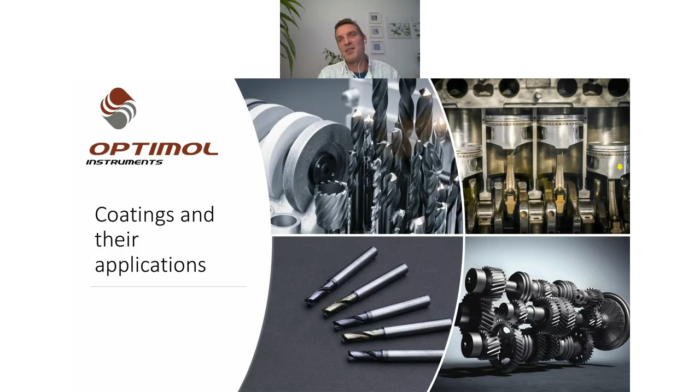But it's not only on the technical side or in industry sectors, it's also in everyday use or in our everyday life. For example, one of the major impacts of coatings will be medical applications. If you are thinking of the tools the doctors are using

Sorry, because sometimes the chat comes into my screen and this is a little bit disturbing, but to move on.

So medical applications are a wide field of application because of their tools. Think of their cutting tools when they need to grab something from your body, but also knee or hip replacements. So I'm talking about the joints, because it's gaining more and more importance if you need to implant something into the human body, but also in the household.

If you have a look in your bathroom, razor blades, for example, or the blades of scissors are also coated, as well as pens and all the things in your kitchen. And more important is all about electronics and electronic plug-in connectors. Maybe you're familiar with gold coatings, but there are a lot of other coatings applied onto electrical connectors. With the pictures shown at the very beginning, maybe I can sum it up on this slide.

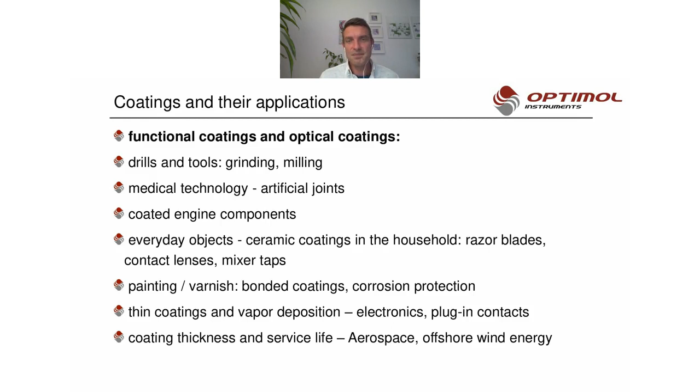So this being said, there seem to be a lot of benefits with technical coatings. Otherwise, they wouldn't be implemented or released to the market. One of the major benefits, from my point of view, is that you are able to adjust the properties of the surface which is getting in contact. And there are a lot of possibilities. For example, you could produce multiple-layer coatings. And sometimes it's used for defined running-in behavior of systems.

Coming back to the applications in passenger cars, in the past it was crucial to drive the first, let's say, 1,000 kilometers very smoothly to make sure all those engine components were running in properly. But nowadays it isn't necessary anymore. So you can move on at full throttle because the critical parts are coated already and they are targeted for defined running-in behavior because of a multi-layer coating.

Another, more in-depth example is that you are able to combine properties of your materials. For example, you can use a very cheap cast iron base material, bulk material, and use the positive properties of those materials, and then add a very hard or super hard surface finish, for example, with DLC coating.

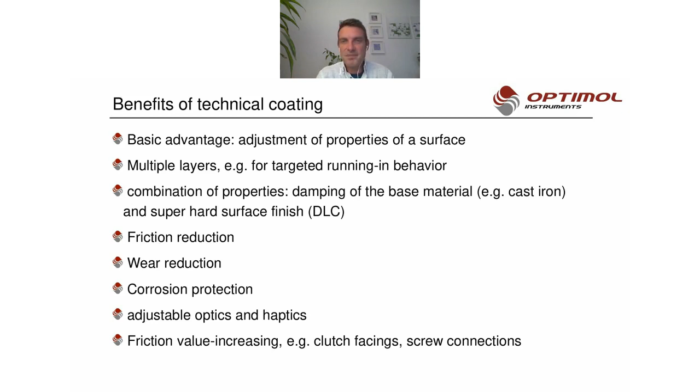But if there are benefits, I really often say if there is a lot of sunshine, there are also a lot of shadows. And I just want to mention some challenges with these technical coatings, and you can handle those better if you have a deeper understanding, for example, if you are running tribological testing with those solutions. So first of all, it's way more expensive, obviously, because if you are using additional technology and additional processes, you need materials, you need time, and all that comes together as an additional cost factor. And sometimes it's missed in discussions, and that's why I pointed it out here.

All those coatings and processes need to have a suitability for large-scale production, because if you're thinking of, for example, Volkswagen or medical applications, you need to make sure that there is quality assurance and that the products will work for millions and millions of parts if you release those to the market.

Another thing is, most of those coatings are not so friendly, let's say, with lubricants like oil or greases, because those oils and greases already on the market are very often produced and developed for metallic surfaces. But most of those coatings we are talking about are non-metallic, or they are not behaving like iron or steel. And that's why you need to make sure that not just the counter body and your basic body, which are in contact, are working fine together. It needs to work also with the lubrication.

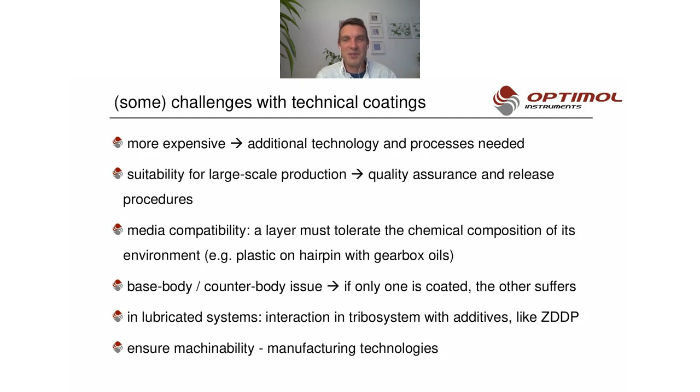And last but not least, you need to make sure that you are able to machine your coating. Because if you have manufacturing technologies like grinding or honing processes, you need to make sure that the surface is not too hard and has good bonding to be able to manufacture it.

And before I come and show some case studies we did, I would like to sum it up. What are the opportunities of technical coatings? First of all, it's very often an enabler for new concepts, because if you're failing with classic material combinations, or you need to have more performance, for example, in engine cars, you would like to introduce new material combinations. And very often they are done with coating processes.

And very often I saw suggestions for using coatings because there was a problem or an issue in the field. A lot of people like to introduce coatings as a problem solver, as I called it here. So just to reduce the energy consumption, for example, of the car or of the electrical systems, to increase efficiency due to a lower friction situation, or to extend the lifetime or service intervals, for example, the oil change interval.

Another beneficial way is to use coatings if you are faced with dry contact areas. Sometimes it's not possible or not suitable to use lubrication. There is a good example in aerospace applications, because if you are running your systems in vacuum or without any G-forces, your lubrication will not stay at the contact zone. Sometimes the areas get dry, and then you need to have a good friction and wear situation, even if there is no more lubrication in the system.

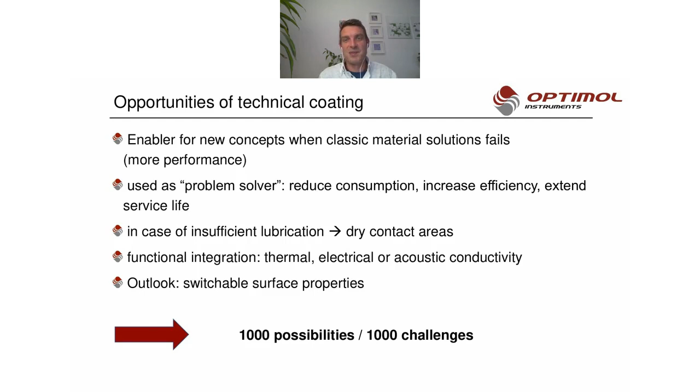And as an outlook to the future, a lot of people are talking about whether it's possible to use coatings which can be actuated, and then you will end up with switchable surface properties just at the click of a button. This will not be possible with classical material solutions, and therefore it's sometimes necessary to introduce new kinds of coatings. But on the other hand, if you have 1,000 possibilities, very often you end up with 1,000 challenges. And that's why I would like to introduce some case studies.

And before I come to those, I would like to talk about who is involved in implementing coatings, on a technical level or in the industry, and who needs to handle those challenges. From my point of view, there are three main topics or departments, let's say. On the one hand, it's research and development, because if you want to implement a new product, new solutions, more performance or a lifetime increase for your systems, you need to do research and development in both industry and university.

And the main focus should be that all your activities need to be cost effective. So low cost because of less time-consuming testing, as well as low need for parts or test specimens, let's say. On the other hand, you need to have a risk-free method, because it's not possible to use one engine a day to test a new coating, because of failure rates. It's getting way too expensive.

And besides research and development, the next step will be series production, as I called it. The typical two challenges there are that you need to have something for your supplier qualifications, and you need to make sure that you have methods for your quality assurance department. So you need to monitor your systems in the series or in the field.

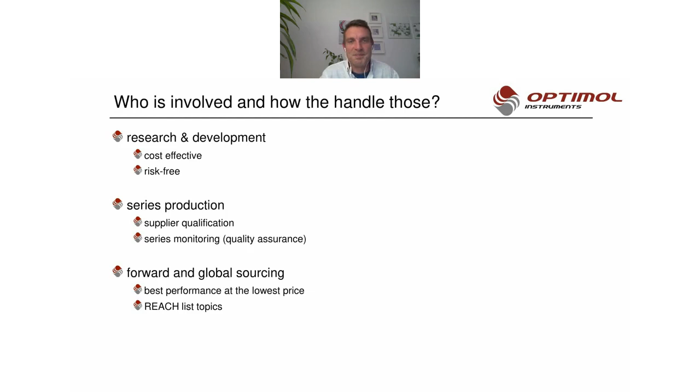And on the other hand, when you're thinking of crises like the war in Europe, sometimes it's not even possible to purchase parts, and then you need to have a solution from another supplier or another technical solution, for example, a new material combination. And to answer all those questions, you need data, and those data are provided by tribological investigations, for example, the use of tribometer test rigs.

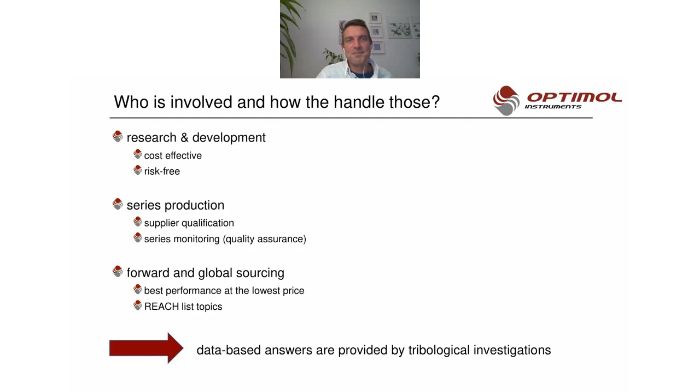And maybe, I'm not very sure, maybe Gregor would like to add something, otherwise I will move on.

Yes, now I'm with you. Okay, so then move on. Yeah. Thank you.

Thank you very much, Patrick.

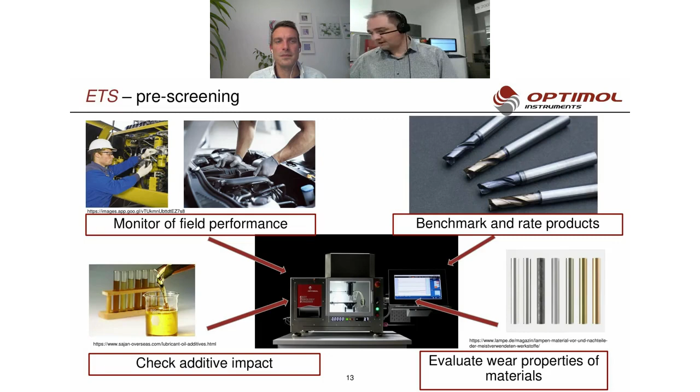We can benchmark products. We can, when talking about lubricants, check the impact of additive packages directly online. And of course, we can evaluate the wear protecting properties of materials and coatings and lubricants as well. This is what we are doing with the ETS, as I already said. Easy tribology screener, a small tabletop tribometer with a linear reciprocating electromagnetic drive, sinusoidal movement. I will show you later in practice how it looks like.

With a range of parameters, the normal force from 1 Newton to 300 Newton, frequency from 10 to 70 Hertz. Stroke length is variably adjustable between 10 micrometer and 3 millimeter, temperature adjustable. And the interesting point, we can measure in situ the online wear in terms of wear depth, with very great resolution, and we can also measure in situ the coefficient of friction, which is the indicator of friction losses during movement.

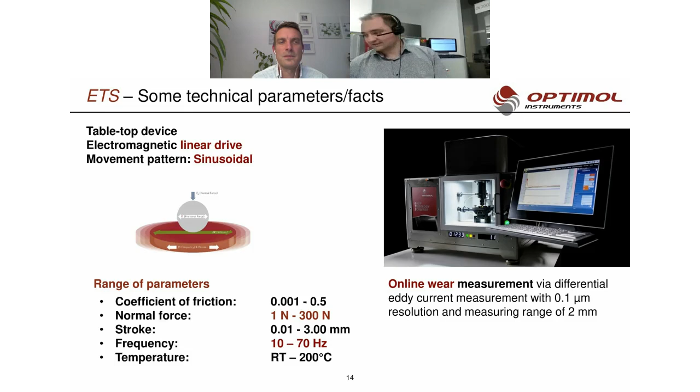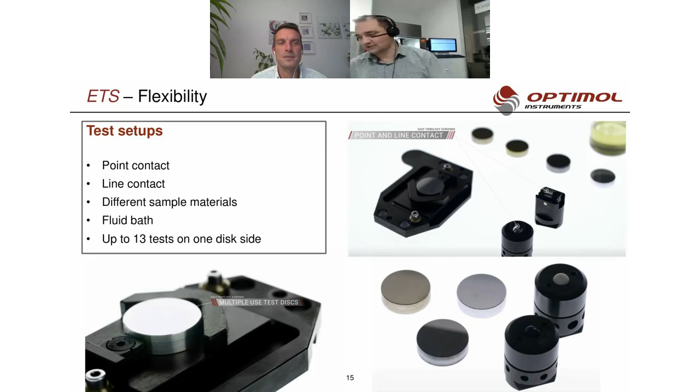The ETS provides quite a nice flexibility with different contact geometries, such as point contacts with different diameters, line contacts. We have different sample materials available for the ETS. They are very easy to be manufactured because of a simple geometry. We have fluid baths in order to run tests, not only under dry, but also under lubricated conditions. And on one disk, you can run up to 13 tests, so that also the material costs are relatively low.

And this is what I just wanted to throw in, a little bit commercially, but it's interesting as background knowledge when talking about the case studies, because then you can visualize on which kind of test rigs those results were produced.

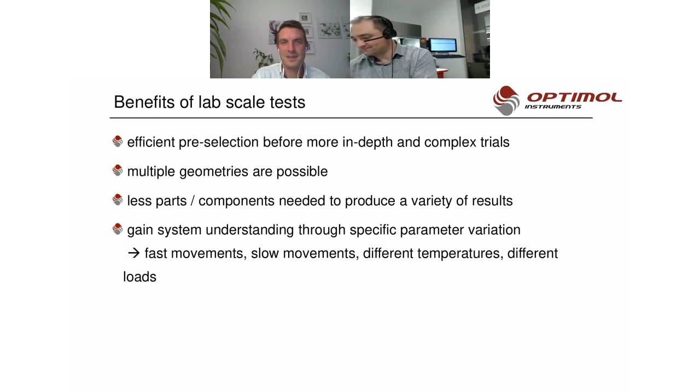Patrick, please go ahead. Yeah, so maybe I will move on. So as you saw, there are a lot of possibilities with those test rigs. And maybe to sum it up, what are the benefits of those lab scale tests? Just some points. The most beneficial is that you have a method for efficient pre-selection before you move on into more in-depth or complex testing procedures, like an engine test, or for example, a test with a knee replacement and knee joint within a human body.

And since multiple geometries are possible, you can change the conditions for your testing. Because it differs if you're using a cylinder geometry or ball geometry within your test, you can have a look at different applications on the same testing procedures. And as I mentioned before, one of the major benefits for industry is that you need fewer parts or components to produce a variety of results.

So if you're thinking of using simple specimen parts like cylinders, discs, or balls, it's obvious that it's way easier to implement them into your test rig, as well as way cheaper than using, for example, engine parts or drills.

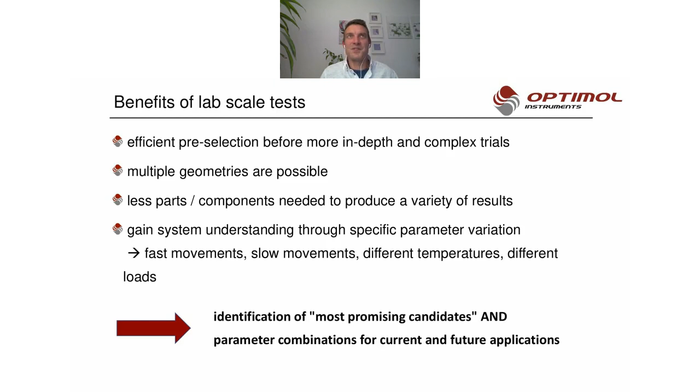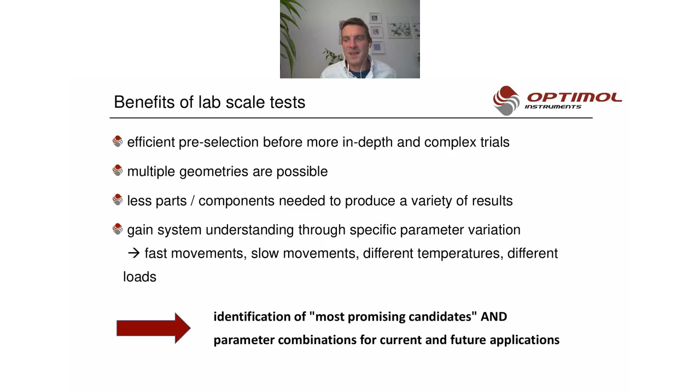And another very important point: you are able to run those tests for your current challenges right now, but also for future applications, because you are able to set up, for example, pressure or load situations which are today not suitable for engines, but may gain importance in the future.

And if you are wondering which application it was, those should be implemented on contact lenses. And the basic idea was that these organic thin films, they look a little bit, on the microscope, a little bit like spaghetti fibers, and they will soak in water. That was the basic idea. So if they are dry, they are applied on this contact lens.

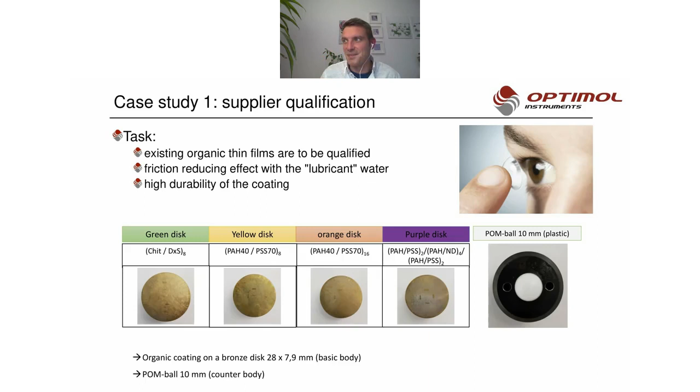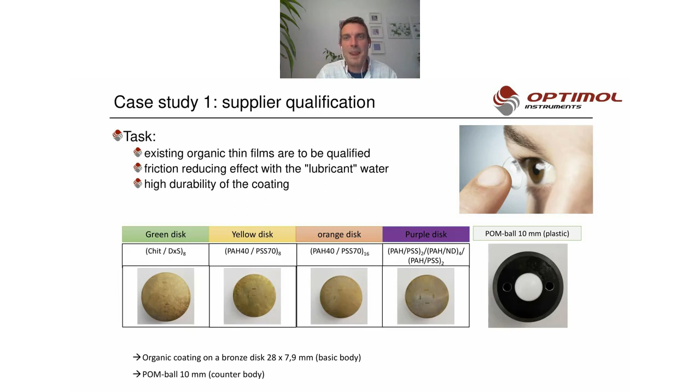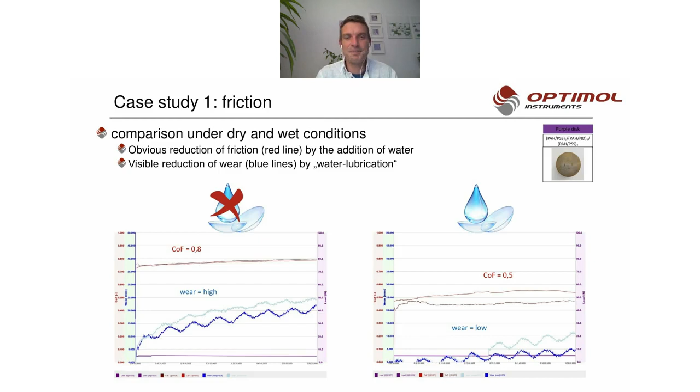And the basic idea was you don't like to end up with some scratches on this coating or some chips getting out or something like this, and you would like to decrease your wear. And you can see it already in these testing procedures because those lines were more on the bottom. But you are able to have a very easy look on the scale here: less wear and a better friction situation. And then we tested all the other coating variants.

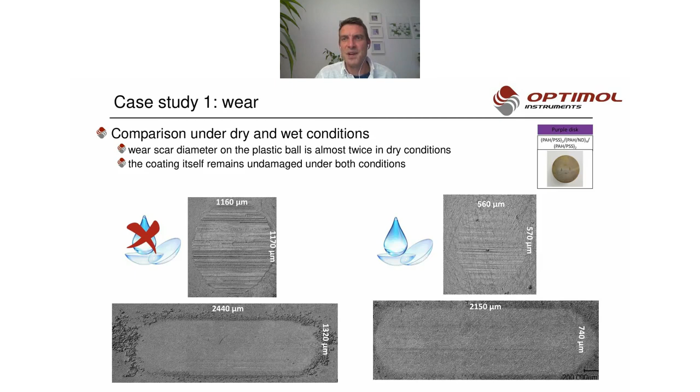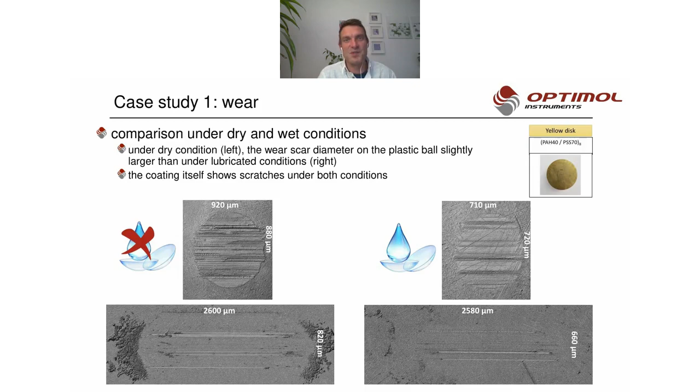And on the right side, even if you add some water, the wear isn't as low as expected, and you will also end up with scratches on the coating. So this is not suitable for any applications with water on contact lenses. It was very easy to sort out those candidates. There were two of those which are not suitable for those applications: the already shown yellow one, as well as the green coating here.

And you are able to gain more and more knowledge besides those data of friction and wear, because you are able to set up your loads and your speeds, and you will end up with different kinds of wear mechanisms, and you are able to have a deep look and a good understanding of what's happening there and why the systems are failing. For example, adhesive wear, so spalling of the coating, scratches, or the production of wear debris, and you don't want to have them in your eyeball.

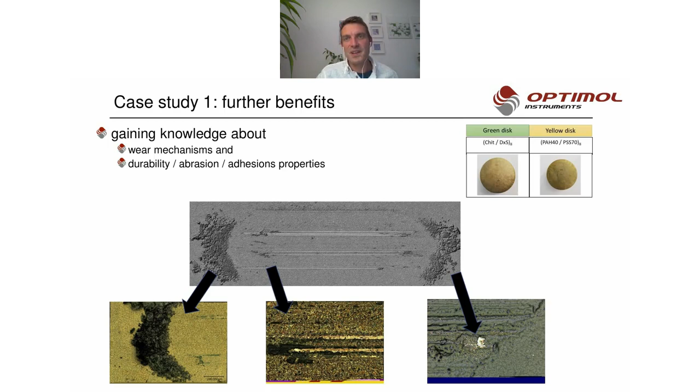So this will lead us to case study number 2. It's more on my technical background within the passenger car and heavy duty truck and bus sector. There was a huge project which focused on fuel reduction in the powertrain. And the idea was to implement low viscosity oils in combination with different kinds of coatings, as well as a geometry adaptation of these piston rings.

And typically there is then a group of different people within your facility and your brand, and you will put all the possibilities and possible solutions out of your research on a table, and you need to discuss which solution, which combination of oil, coatings, and geometry adaptations will be most beneficial to tackle the task of decreasing the energy consumption, or let's say the fuel consumption, of your engine.

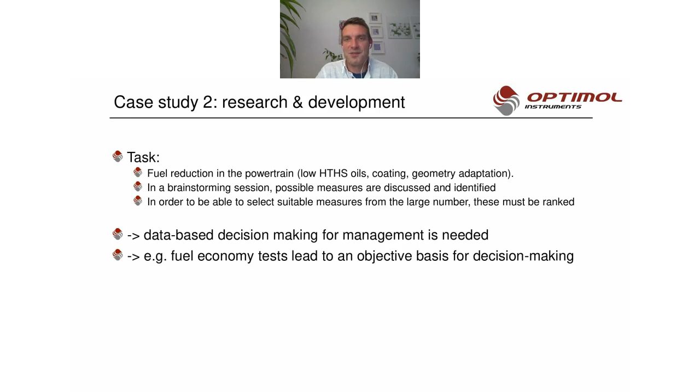And that's why I would like to come along with some numbers here. Typically, and that's the basic investigation effort, if you would like to implement this combination, you need to run, it's also set by government and by standards, 3 of those heavy-duty trucks for 2 times 120,000 km, because the oil change interval is 120,000 kilometers, and you will waste close to 200,000 liters of diesel fuel, and you will end up, for example, with this oil A in combination with a coated piston ring, a solution which is not suitable for your application.

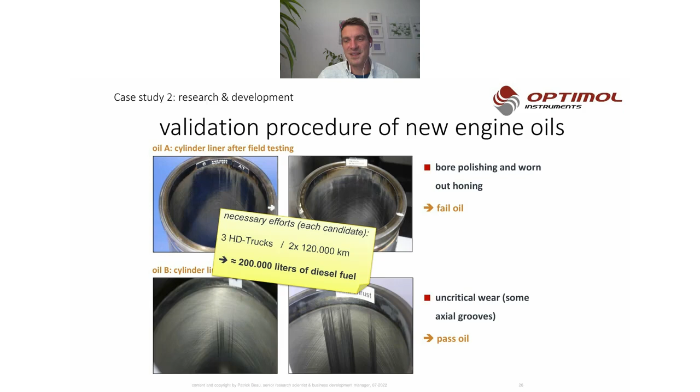And that's one of the examples why it's so beneficial to pre-test it, to pre-screen it in lab scale. And I would show you how we have done this. So we took the original engine parts, because they were coated, and we used just some small parts to put in the test rig. So if you have one pair of piston ring and cylinder liner, you can run a variety of tests. And the major benefit is that you are able to use the original parts with the original geometry, and then you can set that up in a test rig.

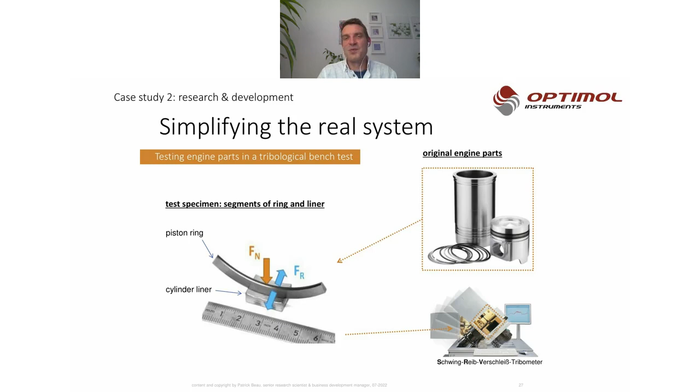And the thing is, afterwards, you would like to end up with, let's say, a one-pager, where you can have a very easy look at which combination, which solution will be the best. And that's what I'd like to show you here. Typically, at Volkswagen Group, we established this kind of one-pager, and there is a lot of information, but it's very easy to read, even for management. One needs to produce the data and then present it on management boards to make a decision which solution will come to the market.

And for engine applications, a typical thing is you need to be aware of scuffing, because if you end up with an adhesive failure in your engine, the engine will get stuck and won't run anymore. And it's very easy to read, because on the left side you have the results of your reference, the actual design. Then you have a comparison to the other candidates, for example those 4 combinations, and the higher the points, the higher the resistance against scuffing. The red candidate is the best because it's the most robust solution. It's also suitable to use the green, the yellow, or even the blue one, but it's way at the bottom and not better than your reference.

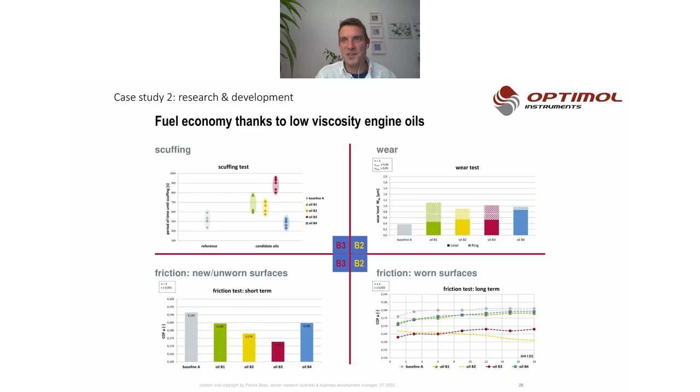Obviously, this grease needs to be non-toxic, because you will use it in combination with water, and it needs to run with water, low temperature and high temperature water, because you would like to use cold and hot water on your mixer tap. It needs to provide a kind of a sealing solution, because there are rubber rings in there, and this grease needs to work together with this rubber combination.

And another very interesting point from my point of view is those greases will have an effect on the haptics of this lever arm. So if you open up or close the lever of the mixer tap, the grease needs to work on a constant level of friction. And for future applications, more and more of those mixer taps are getting electrified.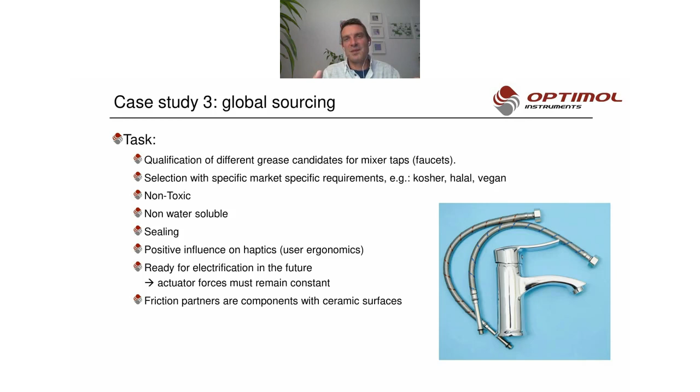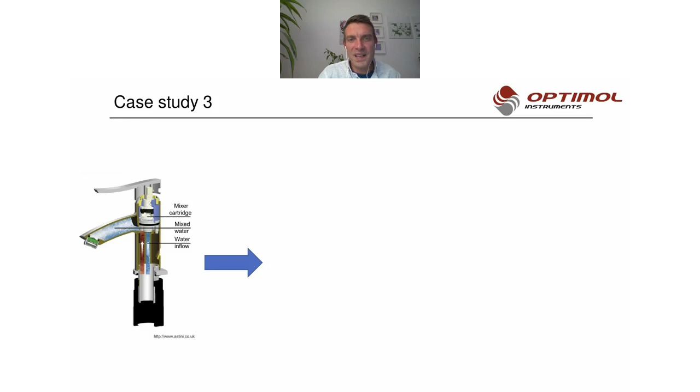And there is a little actuator motor in there, and to make sure the system will run over the lifetime, the forces within this actuator need to remain constant. Otherwise, this will end up with a failure. And we are showing this example because the partners, which I will show you, are coated with a kind of a ceramic, and we implemented those partners within our ETS test stand.

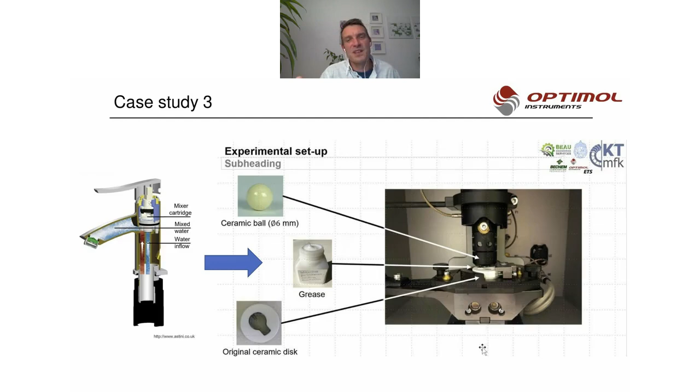So sometimes it's very easy to use the original parts. On the other hand, you need to abstract it and use simple geometries like this ball, and we implemented the grease. And then we did our testing, and I will show it here. So the basic idea was we need a low friction level, and no additional wear should come along with one grease or another.

And so as I told you, we did the testing for room temperature water and hot water. That's why there are 2 bars. We set it up in the test rig for room temperature and 65 degrees. And very obviously, if you are running the system in dry conditions, you will end up with the highest friction forces, and you are able to decrease the friction while using greases.

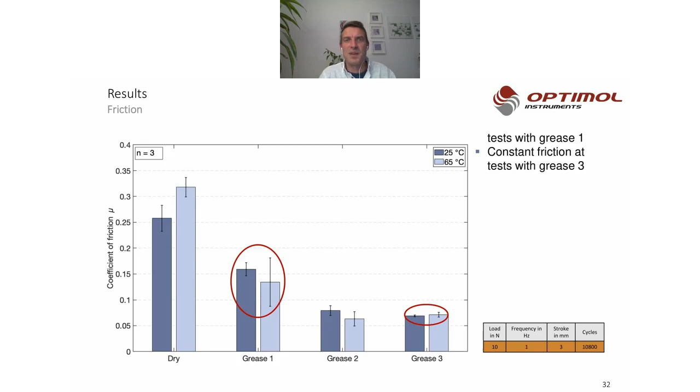But very important, and I would like to highlight, is that something seems to go wrong here, because sometimes you end up with a friction level like here, or sometimes with a very low friction level. And as I already mentioned, the main task was that the friction behavior needs to remain constant over the lifetime. And that's why we had a look at the friction data.

And as you can see on the left side, it's the data for the room temperature test, and on the right side, it's for the high temperature of 65 degrees. And as you can see, the friction level for this grease number 1 is very constant, very smooth until something is happening there. And this behavior gets more and more critical if you raise the temperature.

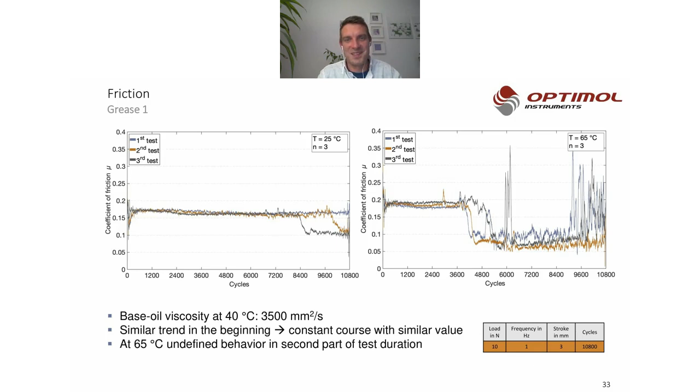And that was very important for our customer to see: is there an influence on the temperature, and will the system remain at constant friction levels during the whole life cycle and all those movements which one would make while using this mixer tap? So you could say this grease number 1 isn't beneficial for the system. You can sort it out.

And then on the other hand, we tested a more beneficial, more promising combination. This is grease number 3. And as you can see here, maybe I can go back and forward, the scaling is the same. Way lower friction level, very promising. And this remains constant also if you implement it with higher temperatures.

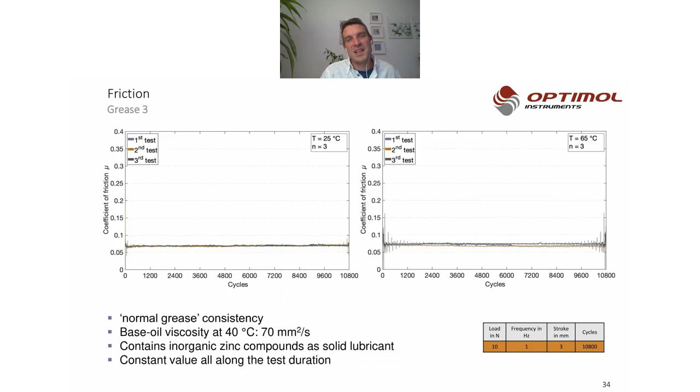And then, besides friction, you need to have a look at the wear behavior, and that was very, very exciting and fascinating, because as you can see here, if you are using this mixer tap without any grease, because there was the idea maybe these ceramic coatings are good to go without any lubricants, without any grease application between those, we ended up with very, very low wear rates for the dry contact.

And what nobody expected is that if you are implementing the, let's say, not so promising grease, or a grease which will not work with this application or those surfaces together, you will end up with much higher wear rates. And it's unexpected, let's say. But as you can see, this grease number 3 with this very smooth friction behavior will also be able to decrease the wear. And as you can see also, there is a slight difference between low temperature and high temperature testings here.

So after we have run all those testings, we could come along with this data to our customer and say, okay, you should implement a grease, because it would be way beneficial for your friction behavior, and that's good for the haptics of your customers while they're using this mixer tap. But you should avoid using the kinds of grease number 1 and 2, because they are not so beneficial. Please move on with grease number 3.

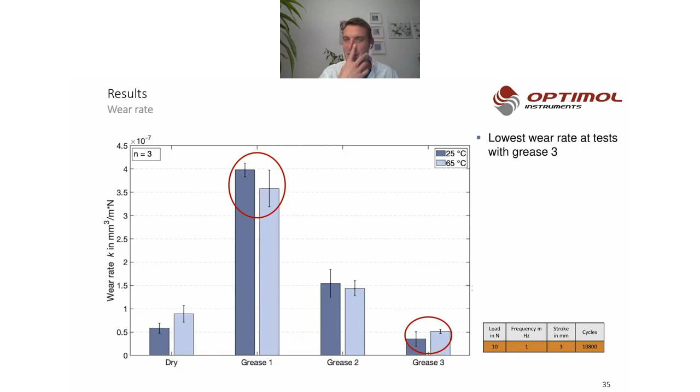So, this being said and shown, maybe it's now a good point to hand over to Gregor and Sam again, to let you guys have a look at this test stand. Yes, thank you. We will try to do the demonstration very quickly. We only have 4 minutes left, I think. It's for our allotted time, but so long as the members of the audience are happy to stay a little longer, we can do that. Would you like me to cue the video, or shall we skip straight to the demo? Yes, we will jump straight to the demo. Okay. And maybe you can post the link to the video in parallel. Absolutely.

And now I'm sharing the screen of our ETS unit. You can see me in the webcam, how I operate the unit. You can see the ETS itself here on the webcam, and you can see the screen in parallel. So the ETS is equipped not only with a mechanical test rig, but also with sensorics and software, of course, that allows you to automatically operate the tests. As you can see, I already installed the samples into the test chamber in order to save time.

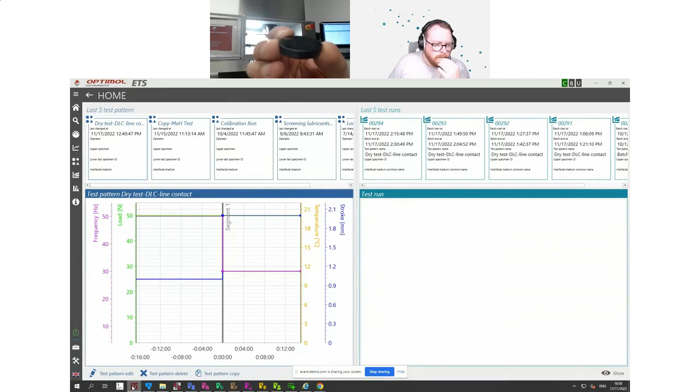The samples basically look like this. Those are discs, in this case steel discs, on which a DLC coating is applied. And the task which we have today is to compare two different variations of DLC coatings. This one here is the reference that I'm showing you in the webcam. I can also show you the result of this reference on the screen.

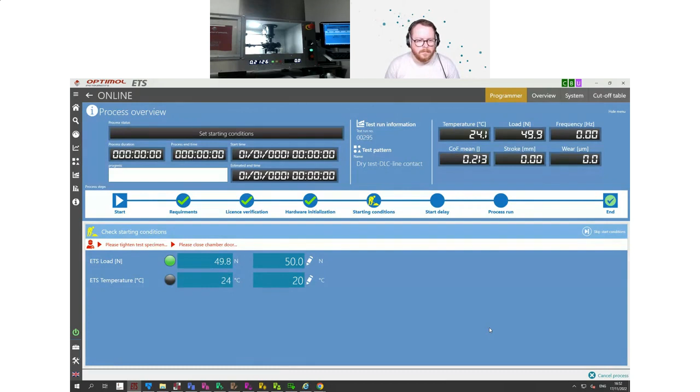I have to hide this here. There we go. And now you see how the normal force is applied here to the samples. The axis moves down and brings the upper sample in contact with the lower sample. In this test, we are using a line contact. Now a short start delay starts to count down in order to get a thermal equilibrium between all tribo partners, and then the test starts automatically.

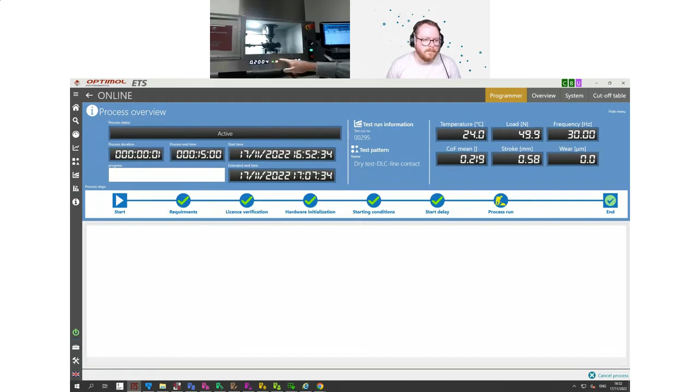And what you can see when the test is starting, you have immediately the values in the displays of the unit, as you can see here and here. On the left-hand side, you see the coefficient of friction. On the right-hand side, you see the actual wear.

And what is very interesting with this coating that we are testing here at the moment: if you remember our reference with 1 micrometer of wear over the entire test, this coating immediately increased to 2 micrometers. So already after 1 minute of test, the wear is relatively higher than the reference. And with that, you could save time and immediately stop the test, because this sample here is already disqualified. Its performance is worse than the performance of the reference.

But in terms of friction, if you're searching for friction reducing properties, you see that the coefficient of friction is significantly lower than with the reference. So maybe it's worth to leave it running a little bit and to judge later which is the best candidate for your application. Parallelly on the screen, you see the online values in terms of temperature, load, frequency, COF, stroke length, and wear.

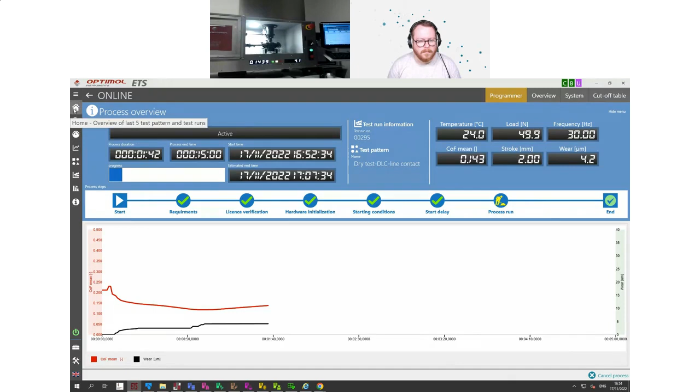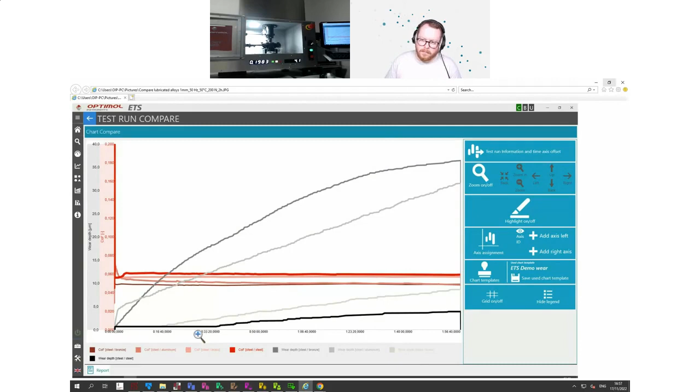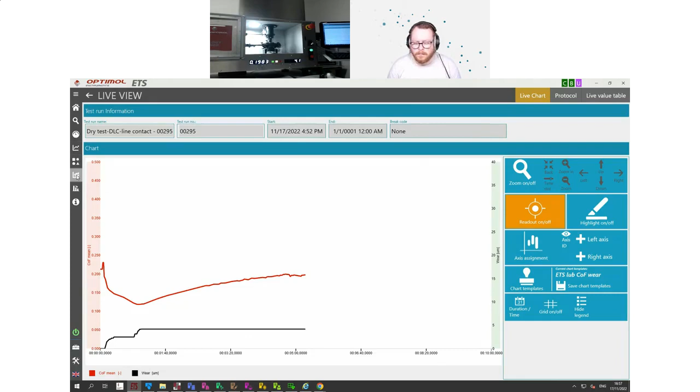And when we look at the current results, we see that the friction also increases during the test, and the wear is already at 4 micrometers. You can see that we have a relatively harsh running in wear compared to our reference, and this now definitely disqualifies this candidate in comparison with the reference, which remained all the time stable at 1 micrometer and a COF of 0.2.

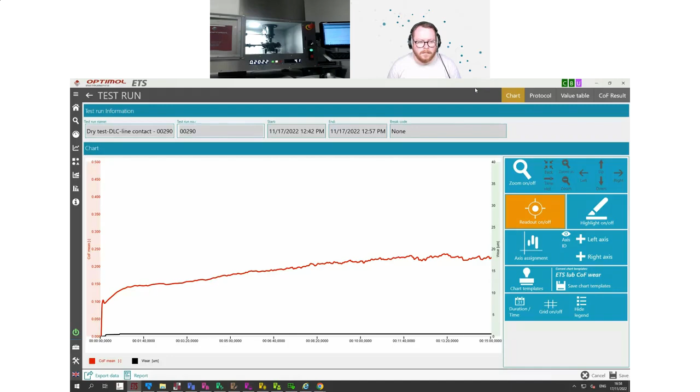With that, I'm closing this demonstration here, stopping the test in order to not have noise in the background. And I'm thanking you for your attention.

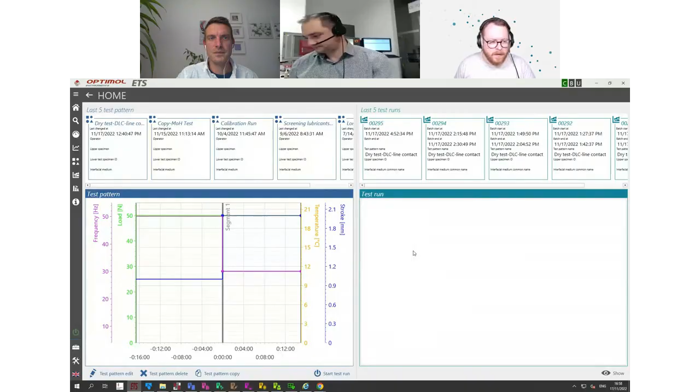So we had a few questions here. I got one from Vikash, who I think is asking a bit more about general coating studies here. I'm not sure whether either of the two of you have worked with electroless coatings, but he's asked about the future of electroless coatings, as he's currently doing a PhD in that area. Do either of you have any insights into this? I think I might have some things to add, if you don't.

Yes, so about different coatings and their properties, we could discuss long. So I would suggest that you contact us offline after the event, and then we can have more deep dive and more discussions about those scientific questions.

In terms of electroless coating generally, it is used a lot in the automotive industry, as far as I'm aware, for bearing use. So there's various different things with different electrolytes used for this, study of coating structures, tribological properties. We could go on, as Gregor said, but there are a lot of questions still to be answered with this, as there are with pretty much every field of coating study. So I hope that helps somewhat.